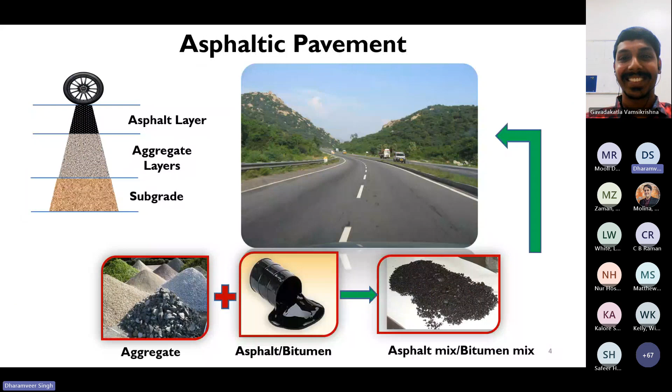Let's start slow since we have all kinds of participants here. I will build up the foundation of what exactly is happening and how we are proceeding in this particular direction.

This is flexible pavement, or you can say asphaltic pavement, or bituminous pavement. In India, we call it a bituminous pavement. The composition shown is simple, though many combinations are possible. The basic structure is subgrade, then aggregate layers, then asphalt layers.

Once constructed, you blend aggregates and binders together, and this is how the asphalt mix or bitumen mix looks like. In India we usually call it bitumen, while in the US they call it asphalt. So we call it bitumen mix.

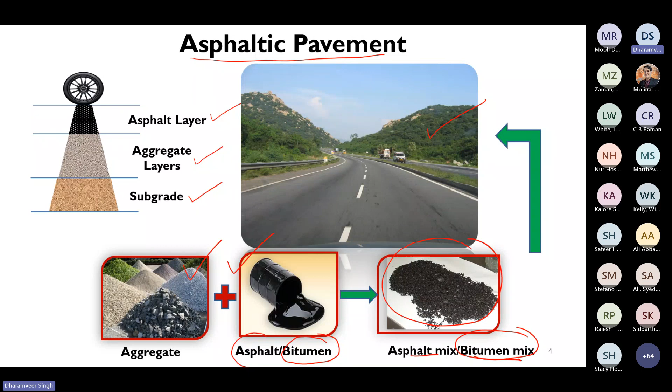Once it's mixed and laid down in the field, this is how it looks. So this is the flexible pavement, the asphaltic pavement, or the bituminous pavement.

Now let's look at different kinds of gradations, since the asphalt mix can be composed of different gradations. For example, in these photographs you see well graded (A), gap graded (B), and open graded (C). These are the different aggregate gradations typically used all over the world.

Dense graded and well graded are both the same thing, and in India we call it bituminous concrete. The gap graded type is SMA, which is also being used in some parts of India now, including mega projects. The open graded type you can think of as open graded friction courses. So this is how the gradations look.

Based on these gradations, you get different kinds of mixes that are laid down in the field. Remember these basic fundamental definitions of the different gradations we have.

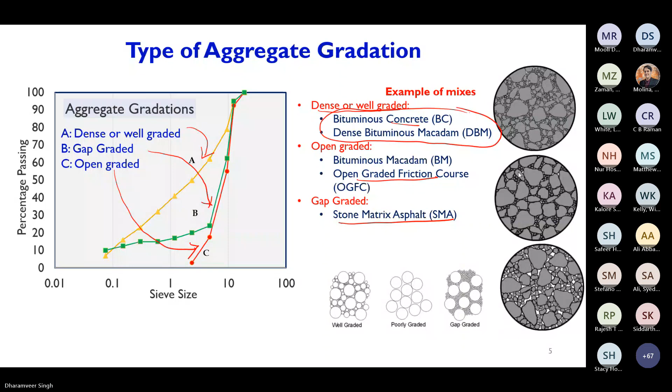These are the typical well graded or dense graded mixes we have in India, starting from nominal maximum aggregate size 37.5, then 26.5, then 19, and 13.2. Usually the smaller sizes are used for the surface course, the mid sizes for the binder course, and the larger ones can go for the base course.

We also have SMA, which is stone matrix asphalt, with two typical gradations: NMAS 13.2 and 19mm. And we have the gap graded rubberized mix, which isn't widely used in India right now, but it does exist.

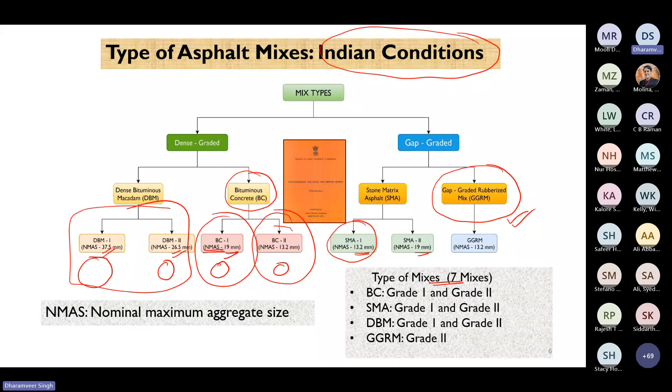So we typically have 7 different mixes used in India, depending on traffic and climatic conditions. Now let's look at the types of binders or mixes of asphalt we have in India and in other parts of the world.

We have unmodified binders, with no modification, and modified binders, which include polymer modifications and rubber modifications. Within polymer modification, there are elastomers and plastomers. Within rubber modification, there's crumb rubber, and in some parts of India, natural rubber as well. These are the different kinds of asphalt binders or bitumen that we have.

Unmodified binder comes directly from the refinery, while modified binder is produced by some agencies who modify it with SBS modifier, plastomers, or other additives. So considering the total combinations, we have 7 gradations and different types of binders, giving multiple possible combinations for base coats, intermediate coats, surface coats, and various traffic and climatic conditions.

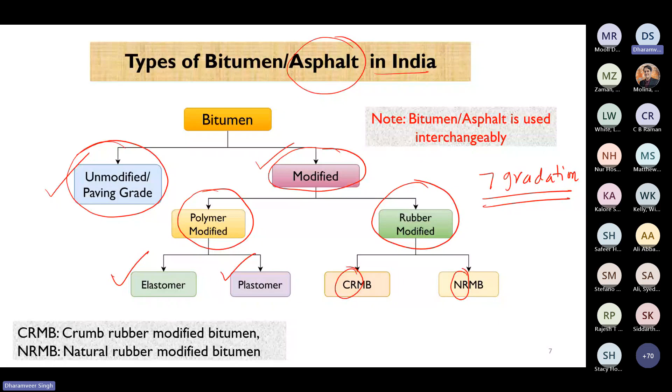If you see the recent things happening, not only in India but other parts of the world, the loading conditions, the traffic loading conditions are quite intense nowadays. In fact, if you see typical highways of India, the traffic may go as high as 100 million ESALs, maybe more than that sometimes.

And the loading conditions are quite excessive. You cannot really control the overloading sometimes on the Indian highways. And that is the real worry, how do you really design the pavement and how do you really select the mixes.

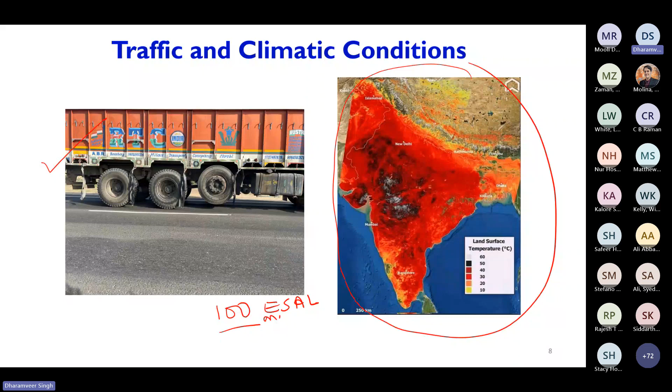What kind of composition you have to select, which can really help us mitigate the distresses. And also you see a lot of temperature change, its moving aggressively higher, and we have the challenge as a highway engineer, how do we design the system which can sustain both temperature and climatic conditions together.

One thing I would like to mention, which is very important, and all these fundamentals we are talking about, the rutting and all, this presentation talks about rutting only. The shear strength of the mixes is quite important, and a lot of work has been done in this area, to understand exactly the shear strength of the asphalt mixes.

This is the very typical Mohr-Coulomb failure theory. The cohesion comes from the bitumen property - what kind of bitumen do you have, whether it is polymer modified binders, whether it is unmodified, or some different kind of modifications. So shear strength is quite important.

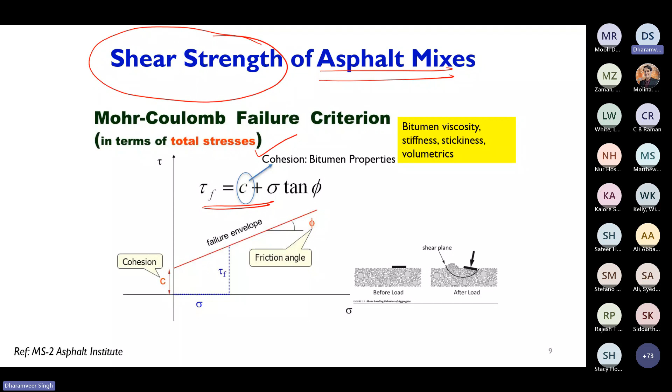When the load comes on top of the asphalt mix, what kind of strength or shear behavior is that mix going to have. And this phi comes from the aggregate interlock - how good your aggregates get interlocked, what kind of shape, texture, angularity, sphericity, and what kind of stability they provide.

So altogether, the mix composition, having binder as well as aggregate property together, is going to provide sufficient strength. Of course the mix design is very important, but we are going to talk about how the mix design is now being converted into a different domain altogether.

If you see nowadays, a lot of development is happening in terms of recycled materials. You have different binders, different additives - some people are adding fiber, waste plastic, rejuvenator, biobinder, all kinds of things are coming up. How do we find out the strength of the mix that's going to be laid on the field? What is the simple tool we can develop to understand the shear strength behavior or characteristics of the mix?

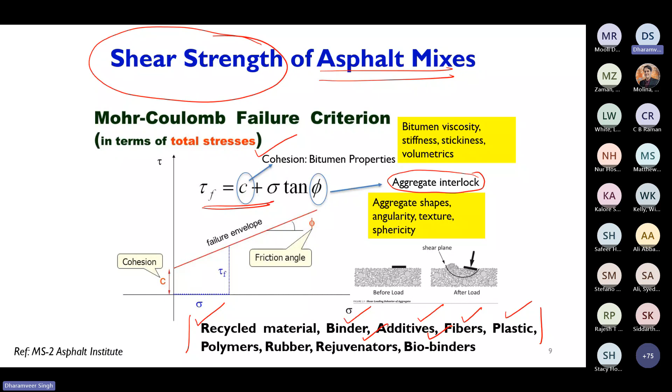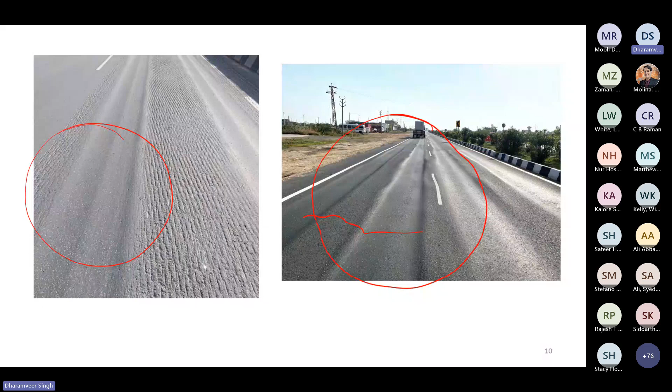And these are very serious issues. Many places in India, you can see these kinds of issues coming up now. You can also see the cracking, but we have not seen many pavements failing in cracking right now. But yes, you can see the cracking. Sometimes we have seen the cracking coming from the top.

So we see top-down cracking coming up, but at some places we design the pavement in terms of bottom-up cracking. So we see both top-down and bottom-up cracking. These are the two issues people are really trying to find the answer to, how do I balance these things together? One side I have the rutting, another side I have the cracking. So something I need to balance, which I can really work out in the field.

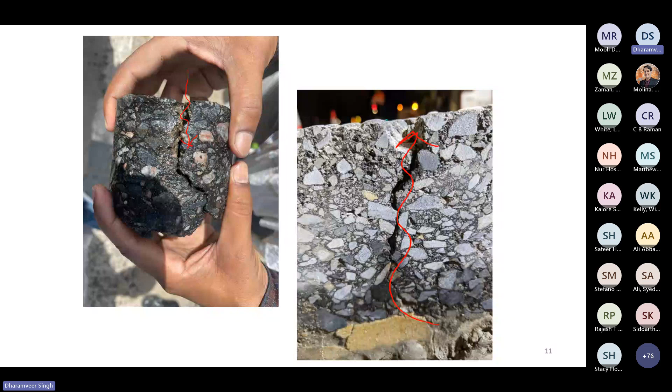And therefore, if you see the recent focus all over the world, in US and Europe and other parts of the world, people are talking about balanced mix design. What exactly is that? How do I balance the rutting and the fatigue life? This presentation is not going to talk about what is balanced mix design, but it's going to give you the tool that you can use in balanced mix design, a tool which can help you understand the mix characteristics. Essentially, if you go deep into this subject, you are trying to balance these two things together.

One is your rutting, another is your cracking. And based on this rutting and cracking, you're trying to find out what exactly is the optimum range of the binder which I can use. In India, we have been using volumetric based mix design or the Marshall mix design, and we are not doing any kind of performance test as of now. But yes, I think gradually we have been pushing the industry to do some kind of testing on the mixes so that we can understand better.

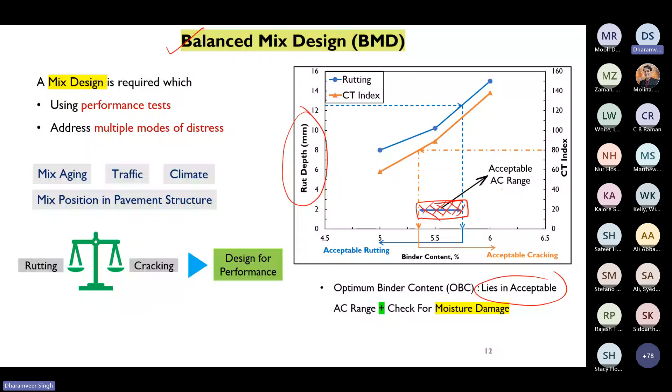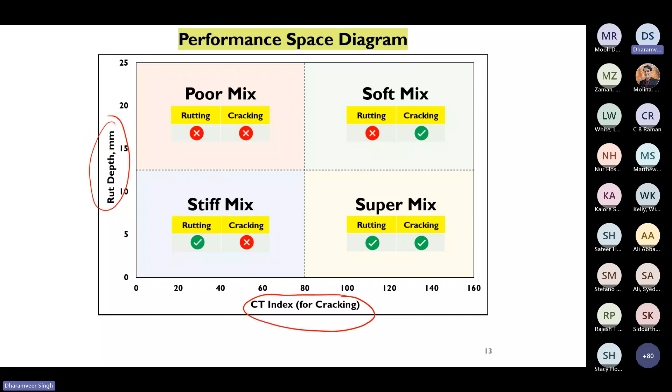If you see this performance space diagram, which is also part of the performance test that we do, one side you have the rutting test, other side you have the cracking test. And based on the threshold value, there is again the kind of debate, or you can say the confidence level, on how do I set up the limit. So I have set up the limit here, let's say 80 for example. My CT index has to be more than 80, and my rut depth has to be less than, let's say, 12.5.

And based on that, you may also do the field validation, because right now a lot of work is going on regarding how do I validate those simple performance tools that people are using in the field. So you can draw this phase diagram, and based on this phase diagram, you can understand what kind of mix you have, what kind of mix you are designing.

For example, if your mix is having rutting more than 12.5, or whatever the threshold value, and cracking is also less than 80, this is definitely the poor mix, with poor rutting as well as cracking performance. If you have a mix with very high rutting but cracking is okay, it means this is the soft mix. And if rutting is okay but cracking is very poor, it means this is a stiffer mix.

People are trying to go here actually. But remember, going here is okay, but you also need to understand the cost economics, what kind of cost consideration, what kind of money you are going to put up to move your mix from here to there, from here to here, or here to there. So those kind of things people are now talking about, what kind of changes we have to do to make sure we have a good mix which we can lay down in the field.

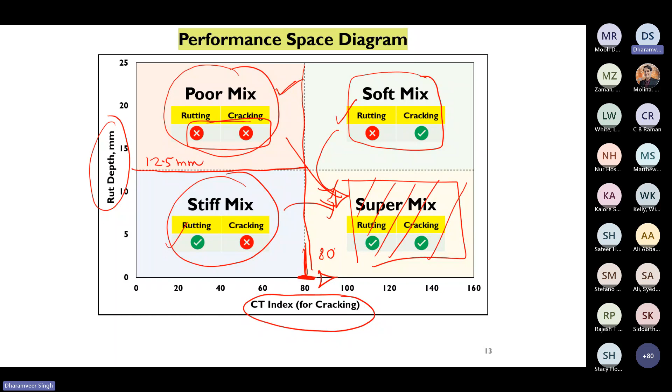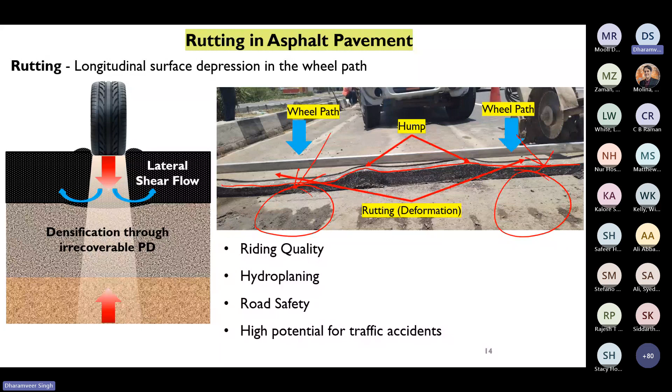So how do I understand that? What kind of tools do I have which I can really utilize during mix design, or maybe the quality control or quality assurance stage? This is the phenomena of how rutting happens, and these are more photographs from one of the highways. You see how the rutting is happening. So you have the initial primary stage, then the secondary stage, then you go for the tertiary stage. And once your mix reaches this stage, it's very difficult to control. It will keep on deforming, keep on failing in the shear, and eventually the whole system is going to fail. So you need to control it somehow at some stage—not only the mix design, but the paving practices are also quite important.

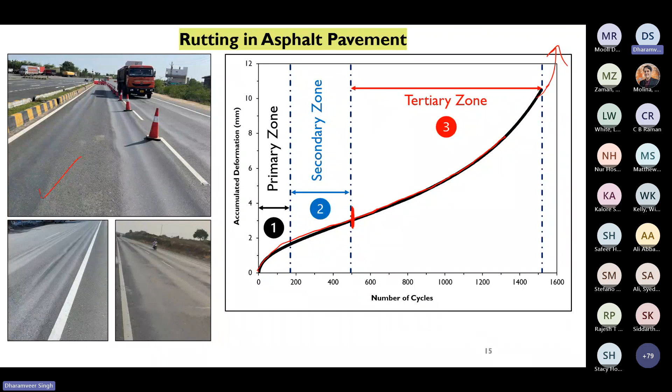So these are the tools that we have right now. In fact, when we do the mix design, after the mix design you just find out what is the rutting characteristic of the mix—what is the Hamburg wheel tracking we use, or maybe APA, or maybe the flow number. These are the widely used test methods right now, and I will discuss this particular test in detail later on. But this is the Hamburg wheel tracking. The cost of the instrument can be quite significant.

If you see the preparation of the sample, compaction, and then testing, you cannot use this tool every day, because it has to be used maybe during mix design. But during QC, it is very difficult because during production you have to do the sampling, then compaction, then wait for a couple of days, or maybe at the quality assurance stage you have to do certain kind of homework.

Definitely the flow number is again a very sophisticated test and not easy or straightforward. You have to do a lot of homework. You have to compact the sample, core the sample, then do the testing, then come up with the results. But yes, I think this is the dynamic testing that you have, and this is the torture test. You can say the Hamburg wheel tracking.

And in many DOTs we also use APA, which is also similar to Hamburg wheel tracking, but the conditions are different. How do you compact, or how do you apply the load on that?

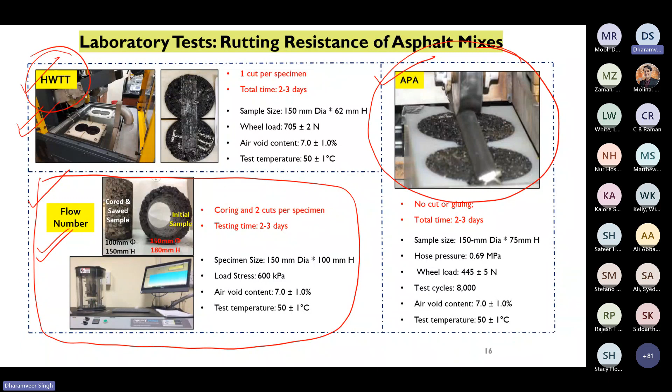I will briefly discuss Hamburg wheel tracking because there are many attendees who don't know exactly what Hamburg wheel tracking is and how we use it. This is a photograph from our lab. This is the Hamburg wheel tracking test.

Usually we compact the sample at 7 plus minus 0.5% air void, which indicates field conditions. And test temperature we can change - maybe 50 degrees, 55, 60 degrees, whatever test temperature you want. And then these are steel wheels. We have rubber wheels as well, but we are using steel wheels right now.

This is how the sample looks like. This particular sample will travel back and forth. It will go maybe 20,000 passes. If you want more, it can go more as well. So once the testing is done, you see what kind of rutting is coming up, whether it is within the threshold limit or not.

But yes, I think this requires a lot of homework, a lot of expense, and the manpower has to be skilled to run this particular test.

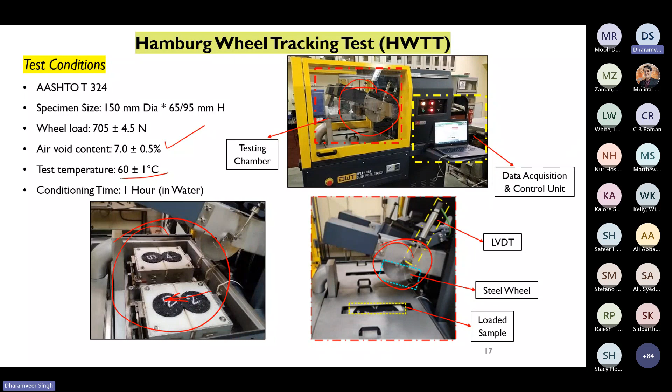Similarly, flow number - again the same way, but this is the dynamic loading condition. You apply the cyclic load here with a certain frequency and run the test. After running the test, you find out what the flow number is. Remember the word I'm using here, the flow number. So flow number is very important because it indicates - higher the flow number, better the mix. That's how we think about it.

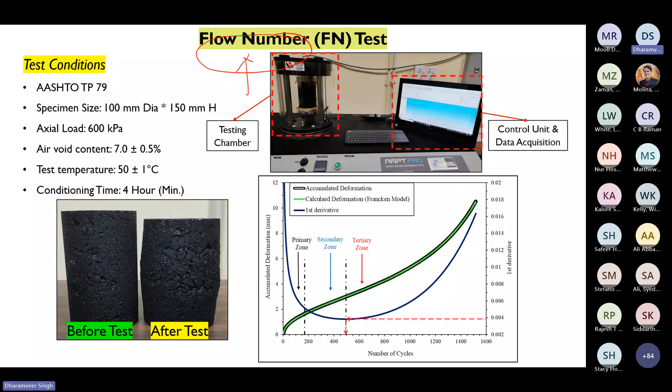But rarely have I seen industries running this flow number test, because it requires a lot of compaction, cutting, coring, then again working in the lab, then bringing it back to the instrument. So a lot of homework is required to conduct this particular test.

So these are the limitations. Of course, you require expensive instruments, you require a saw cutter. These are additional expenses that you have to incur. And of course, it is not possible for the industry or the contractor to have all this kind of setup in the lab or in the field. It's sometimes impossible to have everything. They may have simple tools, but they may not have everything, and they cannot really run all these tests. It's also not feasible to run all these tests.

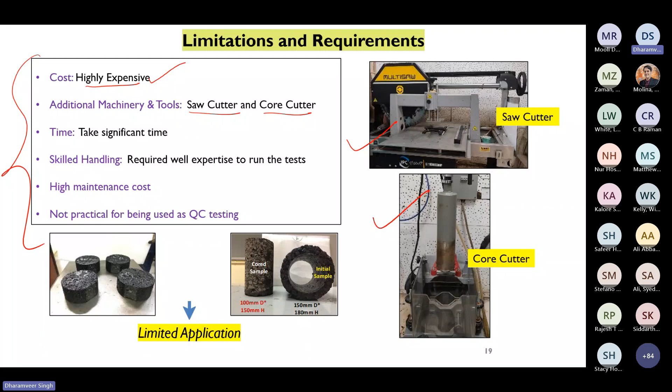So now what is happening - if you see the balanced mix design as well as the simple performance tool, people are talking about this. What is a simple tool that we can really develop to understand the rutting resistance? If you see the simple performance tool, people have come up with a simple definition.

For example, it should be simple. It should not require a lot of complicated instruments or machinery, no cutting, none of that kind of thing. It should be easy to use for quality control and quality assurance purposes. So it has to have good correlation with existing test methods. It should be good to use as a quality control or quality assurance tool - it should be simple, not requiring any complicated setup. Whatever setup the contractor has in the field, can we use that setup to understand the behavior of the mix?

Remember, we are talking about a kind of index number - pass or fail, whether this mix is good or bad. Some kind of threshold or tool that we have to have in our hand to understand if the mix is good or bad.

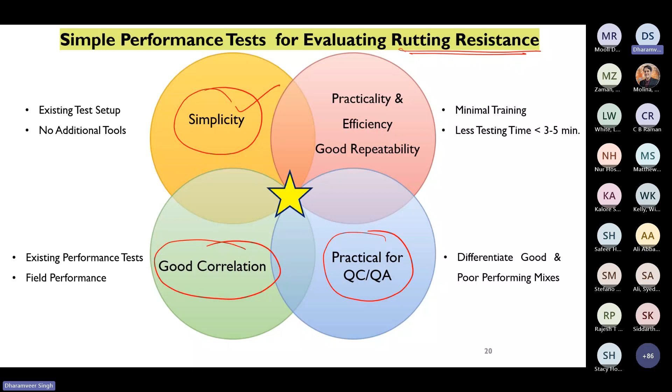If you go through the literature - and there is a lot of literature available right now - Marshall stability is a part of Marshall mix design. In India, we are using Marshall mix design, and Marshall stability is done.

And this is another very important test which many DOTs are using. In fact, this is high temperature IDT. So you are doing IDT, but the temperature is increased. Let's say 50 degrees Celsius. You are running IDT at high temperature.

This is another one of the simple tools that is there as a part of the balanced mix design. You have IDEAL-RT also, which is another tool that some agencies are using. Again, there is a different jig, I will talk about that later on. The temperature is 50 degrees Celsius.

You may have other simple tests also, but they require different kinds of setups. But widely, you are going to see high temperature IDT as well as IDEAL-RT are the widely used test methods. Right now, the industry is really putting a lot of focus on that. And the loading conditions, the air voids, the aggregate sizes, the sample sizes - all these things you can see in the literature.

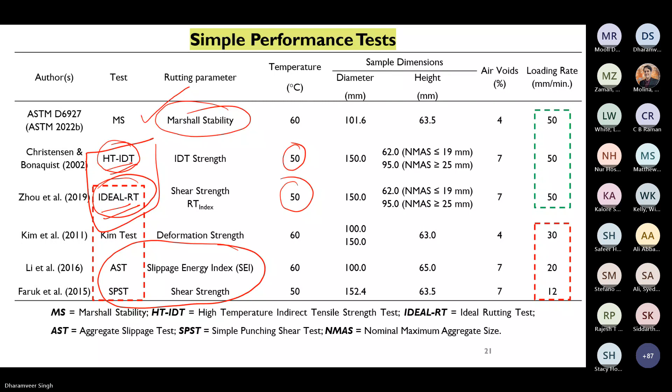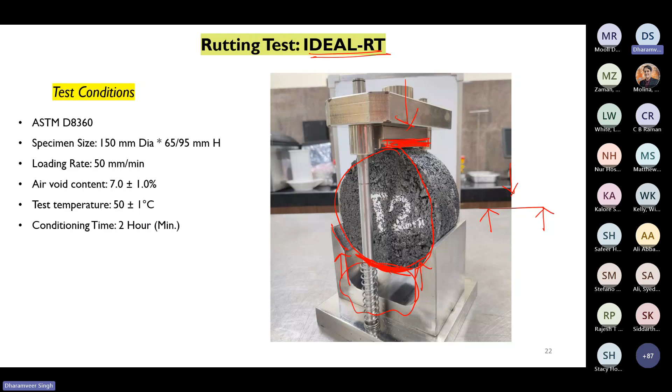But remember here, there is no confinement in the bottom. In the bottom, this is open. So once you apply the load, in the bottom there is no kind of support, or no confinement in the bottom. But this is how the ideal RT setup is being developed.

And in this particular setup, you have the dimension of the sample. You have typical air voids, which is 7% plus or minus 1, or plus or minus 0.5. You have the temperature, and the loading rate is same as Marshall stability or whatever test we typically do on the machine. Very simple test. You don't require any cutting, no notching, nothing. You just compact the sample, put it in the jig, do the testing.

And you get some value out of that. What is that value? What kind of sense is it going to give? We are going to talk about that. So this is ideal RT. Remember the setup that I'm talking about - simple tool, there is no confinement in the bottom, and you apply the load.

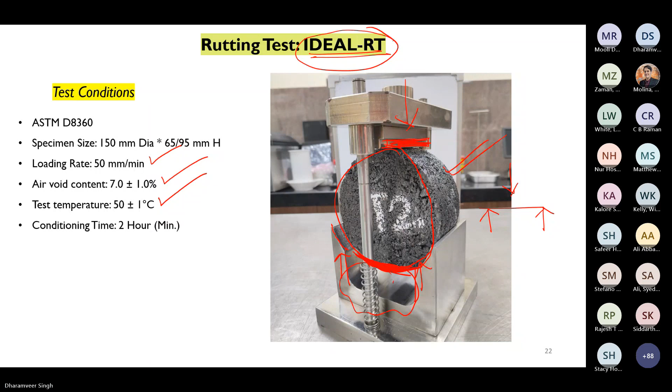And if you see what usually we get from this particular test - you apply the load, and once you apply the load, you have the deformation as well as the load. This is the kind of data that you record from the machine. You have the displacement and you have the load. And you have the peak load here, at what load the mix is getting failed.

And once you have these values with you, you can see how the sample is getting failed in this ideal RT sample. Remember this feature of how the sample is getting failed, because later on I will show you how the sample fails in other kinds of tests. And based on these values, whatever the maximum load that you have, you can find out the shear strength.

And what we are using right now is the RT index. Remember this value that I'm writing here, RT index. And some value has been established in the literature for what the value of the RT index has to be - whether it is 70, whether it is 80, whether it has to be 100. How do I really define the threshold value?

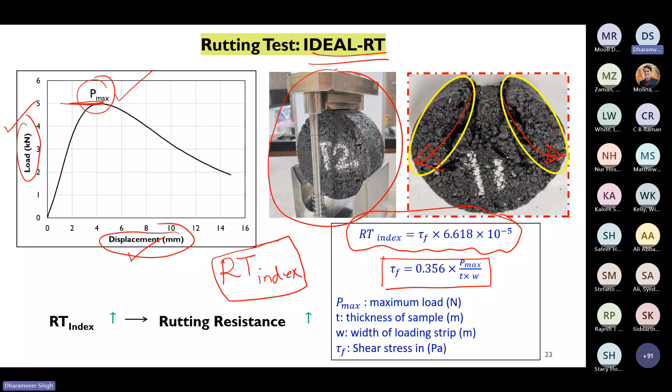So that kind of debate is going on now. What kind of threshold value, what kind of traffic loading conditions, how do I change it - all these things are right now going on.

The only change that has been done is the temperature. Otherwise, we have not changed anything in this particular setup. We are using the same formula, same loading conditions, same air voids. Only the temperature is changed. So the typical ITS of the mix can go maybe 1.2 to 1.5 MPa, but in this situation the value may come down because the temperature has increased.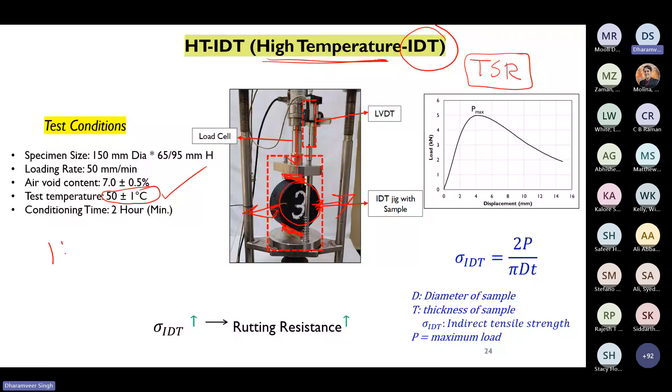So remember two tests I'm talking about: ideal RT, and then this is the HT-IDT. These are two simple tests I'm talking about right now.

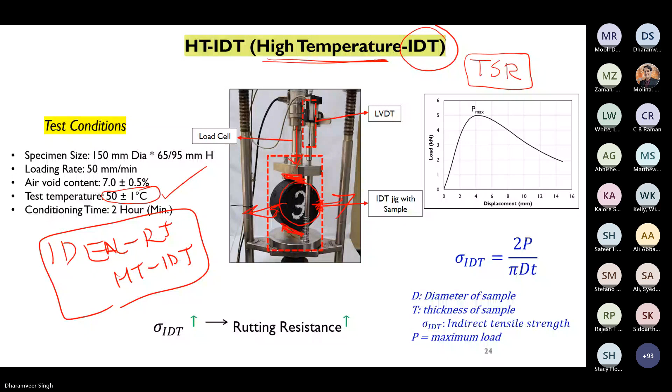Now, what is happening in India? Now I will tell you the motivation, what we have done and why we have done it. So in India right now, we are using Marshall mix design.

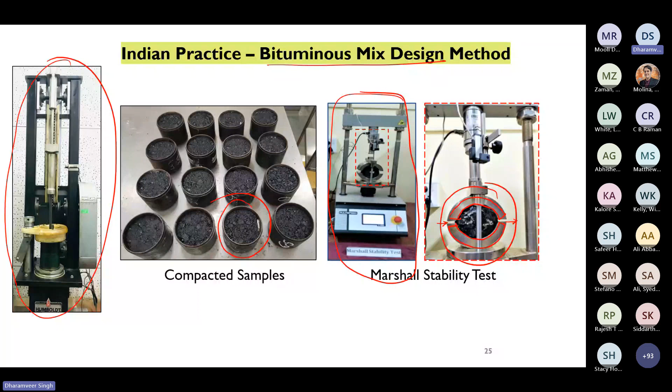Now, what we thought about is, why don't we think something different out of this? So this is the confinement here in the Marshall. This is the confinement in the Marshall here. And this tool or jig is available almost in all the labs. Very simple to do because anyhow we have to do it as part of the Marshall mix design.

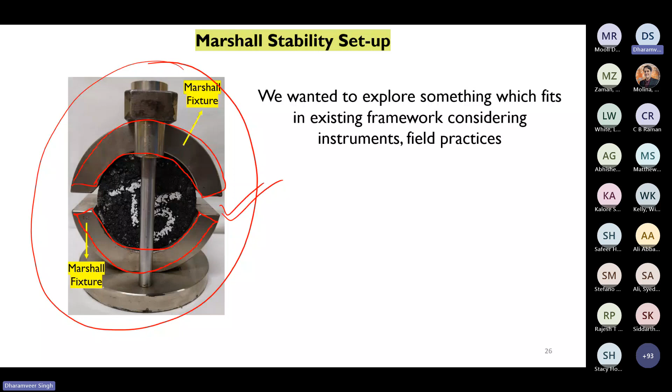So we thought, how do we apply this jig? Can we do some modification on this jig itself and use it as it is, without doing any kind of fabrication like ideal RT or something like that? And this is what we thought about.

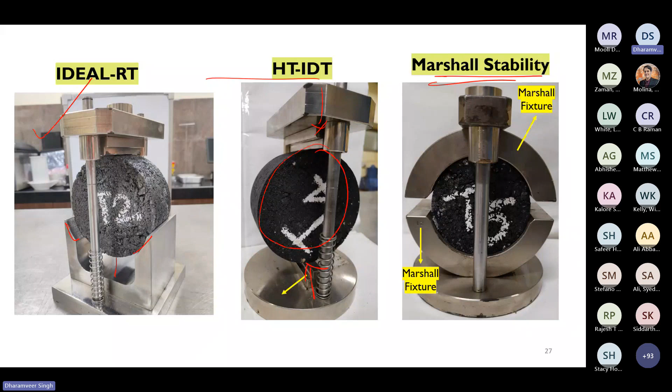Now, we've made some combination here and there. You will see what combination we have done, why we have done that, and what exactly is coming up. Pay attention here. This is Marshall, you have confinement here.

You see ideal, you see high temperature IDT. And what we have done, we have combined them together. We have removed the top cover out of this particular Marshall stability setup, and we have kept this particular confinement and kept this IDT jig here.

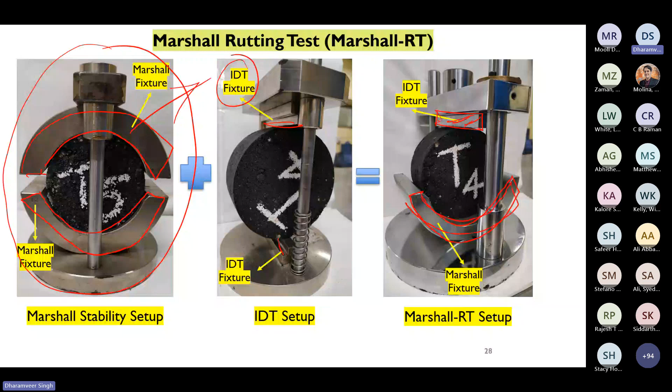The reason we wanted to do this is we wanted to provide some kind of stability on the bottom, the confinement shape, how this sample is confined, because when you put the top layer, the BC layer, there's the layer below, the intermediate layer, the base layer. So we wanted to provide that kind of support and then use this particular space to apply the load and see how the result comes up.

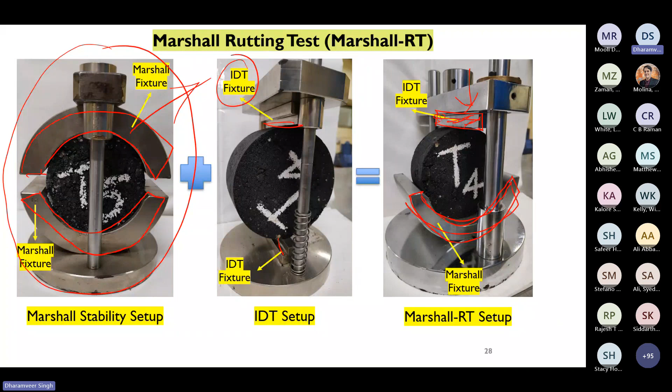Right now we are working on the kind of modeling and all, but it was a very straightforward thought process, let's see how it comes. And whether we have some kind of correlation with the existing methods, RT, or any other test. So that was the simple concept, considering the field applications or the kind of work that we have in India.

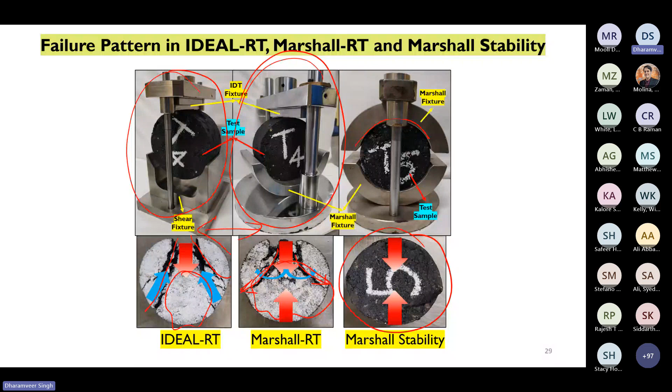Usually the sample is squeezed in the Marshall stability test, so you don't really see the shear behavior in it. But in this particular two tests, definitely there is something going on. You can see a certain kind of failure pattern, which is as close to the field as you'd see for shear failure.

What we have done in this study is collect 9 different mixes, and these are all plant-produced, field mixes. We collected them in different parts of India. If you see the mix here, this is 13.2, which is close to 12.5, which is used in many of the DOTs.

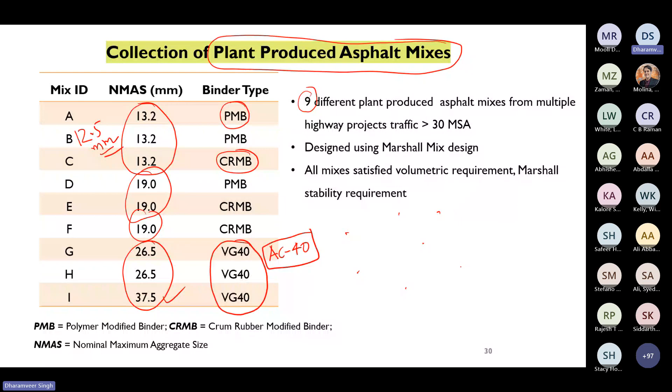Then we have 19 mm, which is the base course, with larger aggregate. PMB is the polymer modified binder, CRMB is the crumb rubber modified binder, and this is your unmodified binder, which is VG40. You can sense it's close to AC40 in viscosity grade, but it's an unmodified binder. Because they are the base course with larger aggregate, we are using unmodified binder in that.

So we collected 9 different asphalt mixes from the plant, and those highways where we collected these mixes were having traffic more than 30 MSA - million standard axles. MSA is the same as million ESALs actually. Some of these highways may have traffic as high as 100 million standard axles.

All these mixes were designed using Marshall mix design, and all the mixes satisfy the volumetric and stability requirements. Volumetrics was absolutely okay, stability was absolutely fine - all mixes were designed using the Marshall stability.

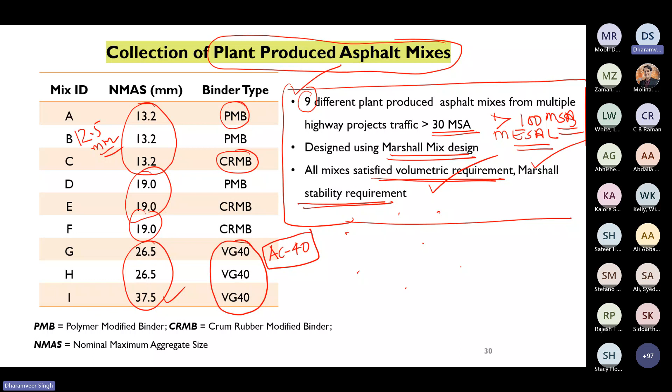We wanted to see how these mixes are going to work out - if we put these mixes in IDEAL-RT, flow number, Hamburg, or Marshall RT, how they are going to behave, and what kind of traffic conditions they are going to satisfy. That was the purpose of doing this exercise, and that way we were getting some insight into the new test we tried to explore.

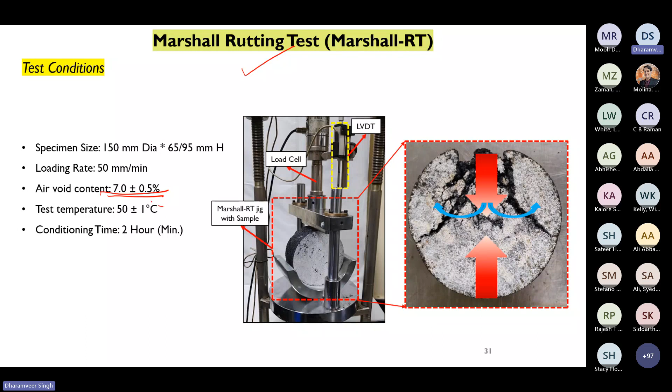So first, what we have done is the Marshall RT. We compacted the sample, and for all 9 mixes, typically we have done almost 4 samples each for Marshall RT. Air void we have kept around 7 plus minus 0.5, temperature is 50 degrees Celsius, and this is how the setup looks like.

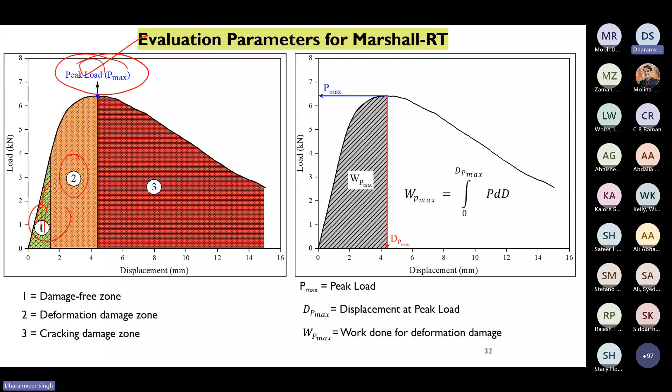If you see what exactly we are doing for calculation - we are not using the peak load directly, we are also doing a certain kind of work done calculation before failure. So we are dividing into 3 different zones. One zone is the peak load, this is the damage-free zone, then damage starts in this particular zone, and then this is the failure, the cracking. What we are doing is taking the work done before it starts initiating the failure.

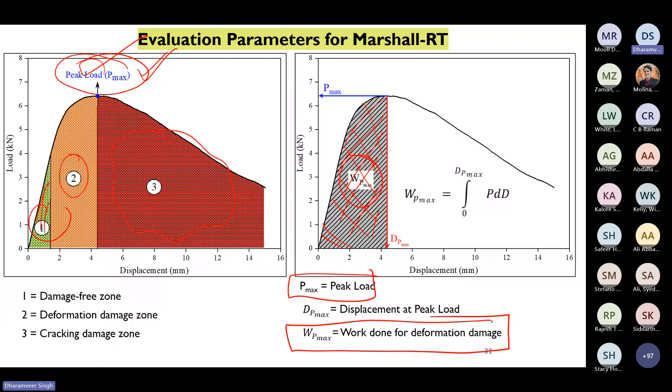So this work done can be calculated. We are using 2 parameters here - one is the peak load, another is the work done. So please remember those 2 values - one is your peak load, another is your work done for the deformation damage. These 2 parameters we are trying to see how they correlate actually.

But how do I really categorize them based on different traffic conditions? Of course, from this diagram I can see this mix is not working out very good, or this mix is not working out very good. But we need to correlate that - remember, this is the new test that is coming up.

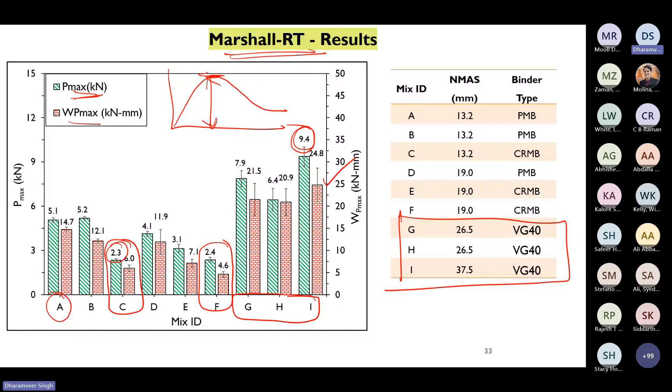So we wanted to correlate what kind of correlations are going to come up from flow number, from Hamburg wheel tracking, or from ideal RT. So we conducted Marshall RT, and then correlated this particular outcome with Hamburg, then flow number, then ideal RT.

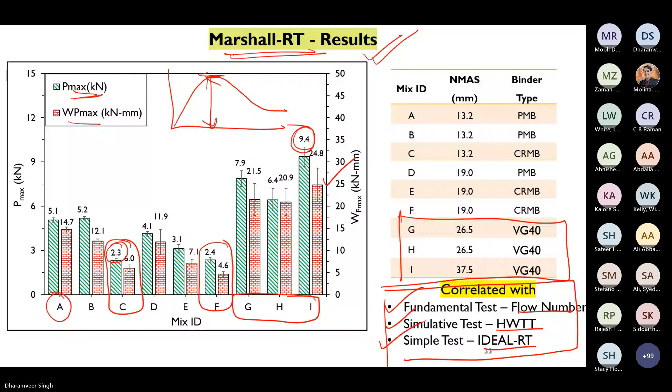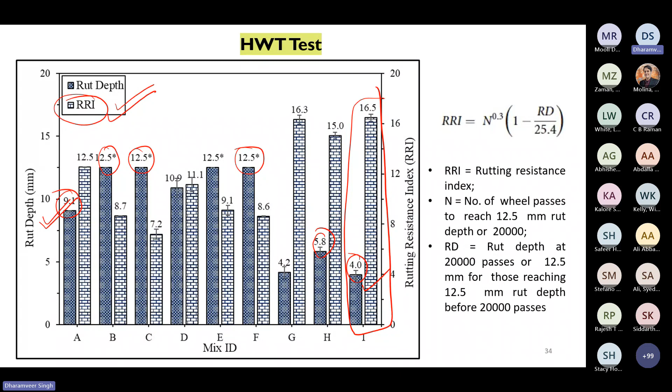Now, this is quite interesting because if this particular rut depth or RRI value correlates with the Marshall RT, then we can have certain confidence in this particular setup that we are developing. And therefore, later on, we have correlated that actually.

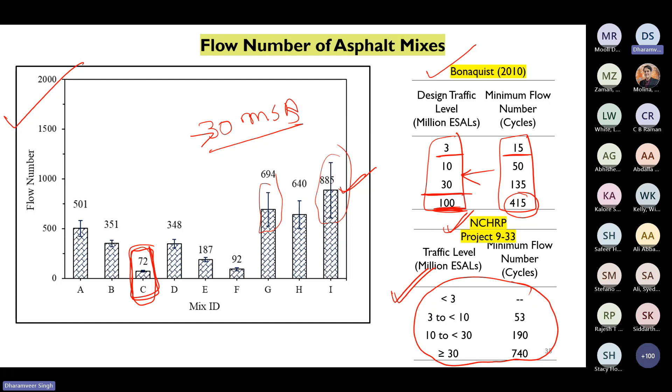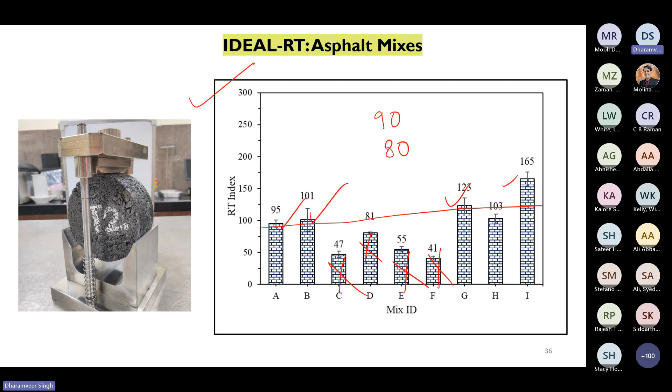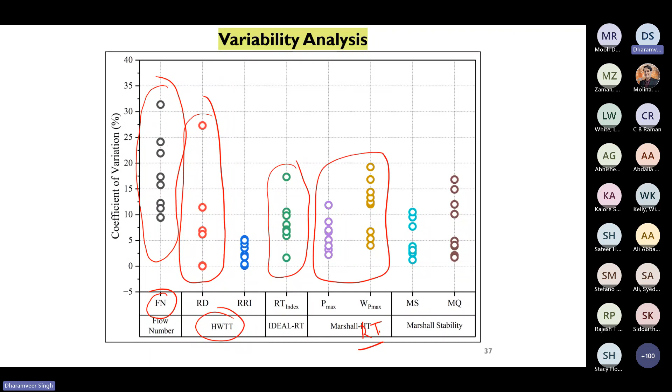And Marshall RT—if you are seeing here, this is also showing variability less than 20% that you can think about actually.

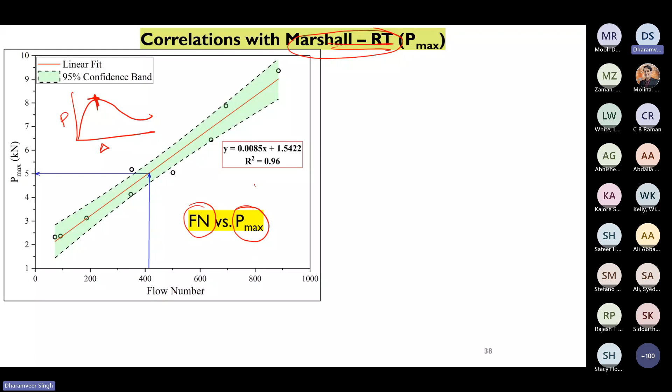So what we have done is compared flow number versus P max. Remember, P max comes from the Marshall RT. When we are doing the Marshall RT test like this, the maximum load comes up—this is the displacement, this is the load, and this maximum load comes from the Marshall RT test. This is the flow number, and this is your P max.

We are trying to see the correlation between these two, whether the flow number is really getting correlated with the Marshall or the Marshall RT or not. And it looks like very reasonable correlation between these two. Definitely, the number of mixes is quite less than 9, but we are keep on adding the number of mixes now. Right now we may have more than 20 or 30 mixes that we are going to plot. But yes, it gives some indication that there is some correlation between these two tests, and this Marshall RT can be utilized later on.

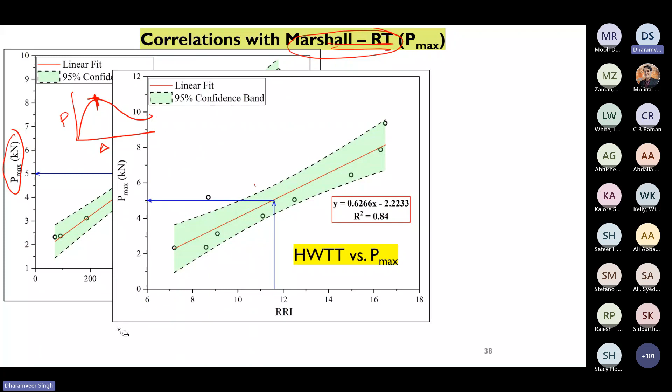Likewise, if you see Hamburg wheel tracking versus this P max, again we see certain kind of variability here and there, like a couple of mixes that look to be outliers. But if you go for the 95% confidence band, it looks to be fair correlation between Hamburg wheel tracking versus the maximum load.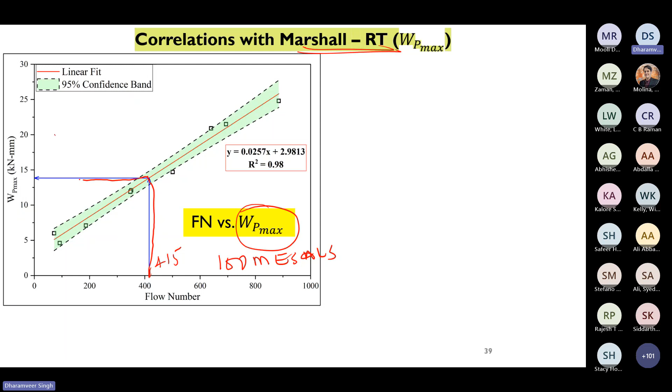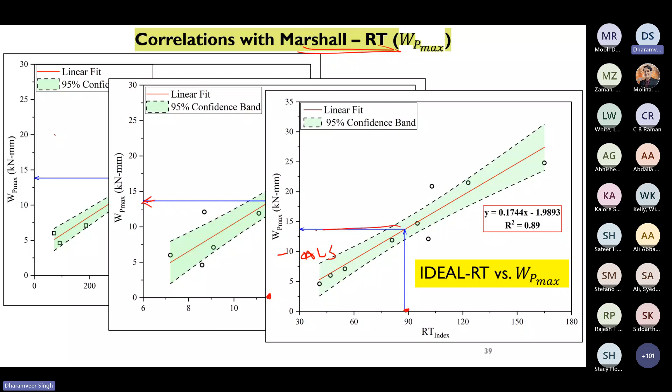What we have done, if you see these back slides, for 100 MSA for example, this value is 415, and this is for 100 million ESALs. So for 100 million ESALs, what is the max value that we require? Like this, and for minimum, likewise for 100 MSA or 100 million standard axles, if I'm considering this as a limit, what is the value that you need? Likewise for RT, that I'm assuming close to 90, for 90 what is the maximum value that you need?

So that kind of correlation we have developed, and this is for the different traffic loading condition: 3, 30, and 100 MSA. And if you do the correlation, IDEAL RT comes close to 90 if your traffic is more than 100 million standard axles. And remember, the value typically agencies are using is close to 80 to 90. And if you link this back to Marshall RT, maybe the maximum load which is coming around 5 kilonewton, if you go for the work done, which is close to 14 kilonewton mm. If you go for 30 MSA or 30 million ESALs, then definitely this value comes to 2.7 or 6.

And likewise, if you use NCHRP threshold values, again you can find out what are the different threshold values of the P max as well as the work done for Marshall test. And likewise you can also develop different threshold values for the IDEAL RT. Remember, this has to be validated. We're just putting a lot of emphasis that these values are logical, and therefore other ranges are also logical. So this has to be validated, whatever we have been putting up here.

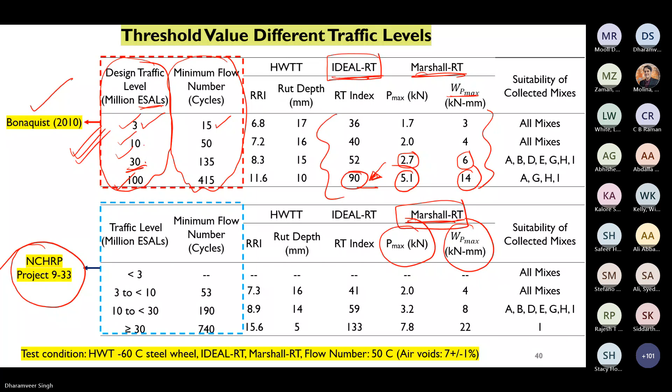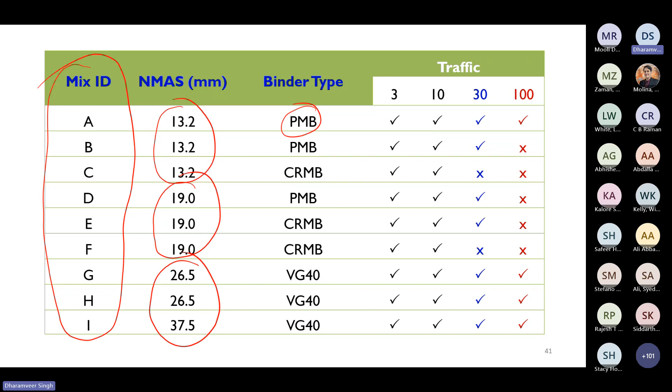So finally, what we have done: whatever mixes we have collected, remember in the beginning I said 9 mixes we collected, and these are surface mixes, these are the binder course, and these are the base course, and PMB mix here if I categorize this particular mix. And also I mentioned that we collected the mix where the traffic was more than 30 MSA, or maybe sometimes more than 50 MSA, but let's assume more than 30 MSA. All these mixes are absolutely okay if your traffic is 3 million ESALs.

Or in India we call it million standard axles. But if you increase the traffic level, for example if I go for 30 million standard axles or 30 million ESALs, then definitely you see the CRMB mix is not working out. And this particular mix is also not working out. There is some issue with that.

If you go further up, for example 100 or more, these particular mixes are not really working out for these heavy loading conditions. All these are ranked based on the Marshall RT that we have done. And right now, wherever these mixes have been laid down in the field, we have been monitoring their performance, so we can have some sense of this particular test that we have developed.

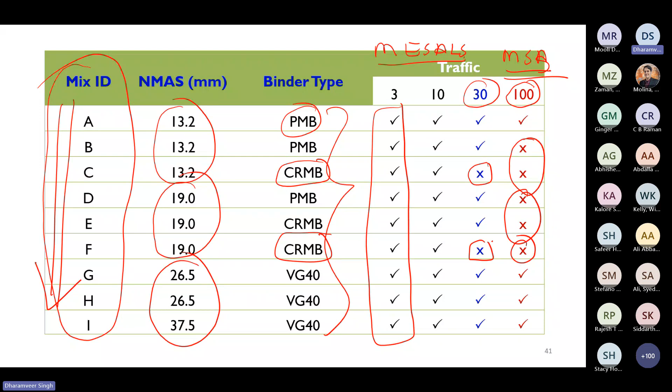So finally, this is the last slide. I would also encourage you to try to generate some data out of this test. It's a very simple tool - you just pick out this upper Marshall jig, apply the load, and this is how your curve comes up, and you get some value out of it to see how things look. You can design for different sample sizes too, whether 4-inch or 6-inch, different types of mixes - RAP or WMA - whatever you want to think about.

This work has been published, as I informed you, in IJPE last year. So you may go through the paper and see the kind of interesting data analysis that we have done in that particular paper.

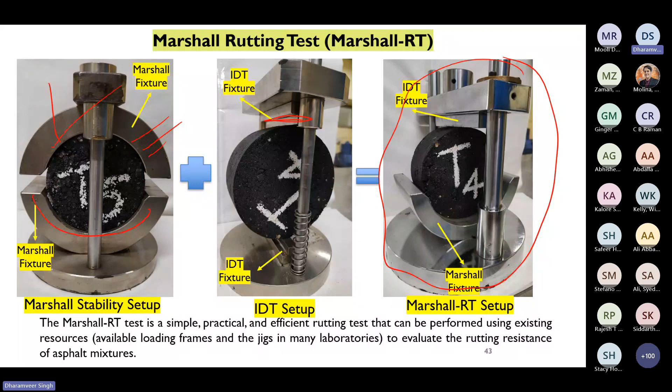Excellent, thank you so much Dr. Singh. That was a great presentation, and right on time too.